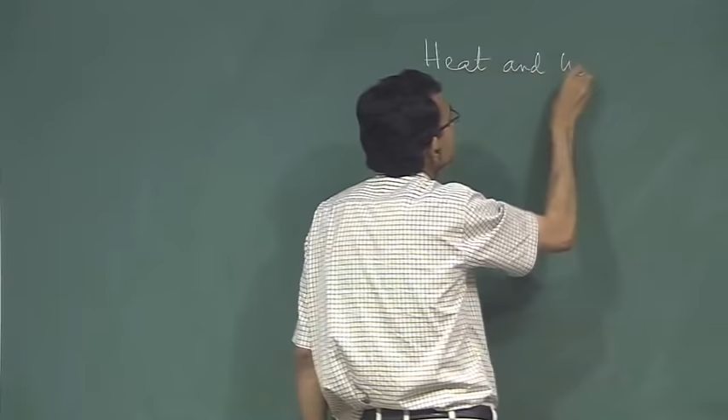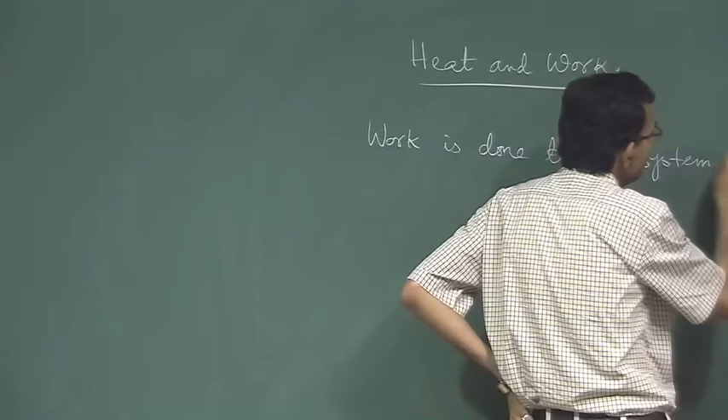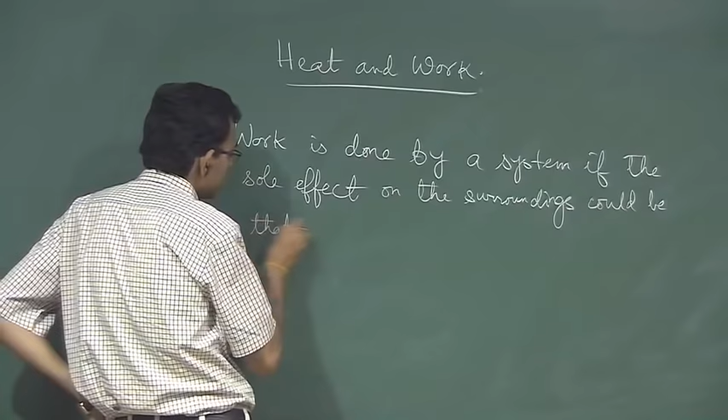There are many classical definitions of these two terminologies, and we will first start with work. Work is done by a system if the sole effects on the surroundings could be that of raising of a weight. This is a very classical statement. It says that if there is a raising of a weight, that gives a flavor of work done.

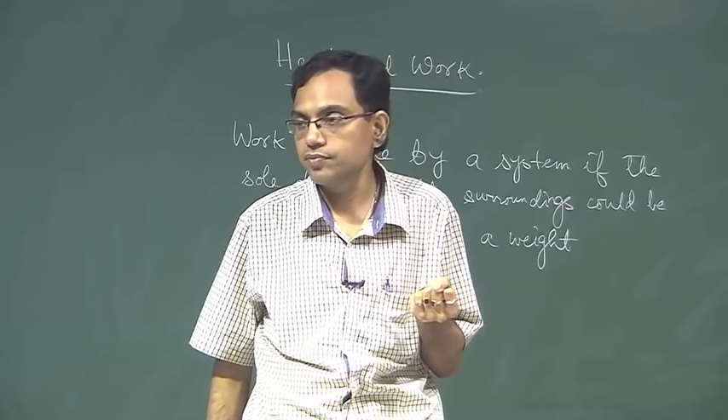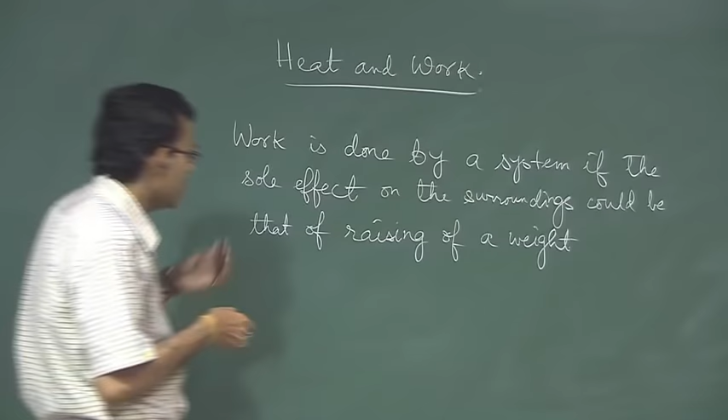Raising of a weight is conceptually representing a situation when you are pulling up something against gravity, that means you are creating a displacement against resistance. So raising of a weight does not technically mean it has to literally be raising of a weight. It means displacement against a resistance. That means if there is no resistance, then there is no work done.

Many of you attending this course are now undergraduate students in different engineering colleges and universities. When you were students at the higher secondary level, you expected a lot of resistance to establish a career, to get an entrance in a good university or engineering college or institute. You were really fighting against a lot of resistance, working in a tough competitive environment. But now that you've come to an engineering college, you believe life is like a luxury. You may be attending class every day but gaining no value, not doing any work, because there is no resistance against you, you are just having a happy-go life.

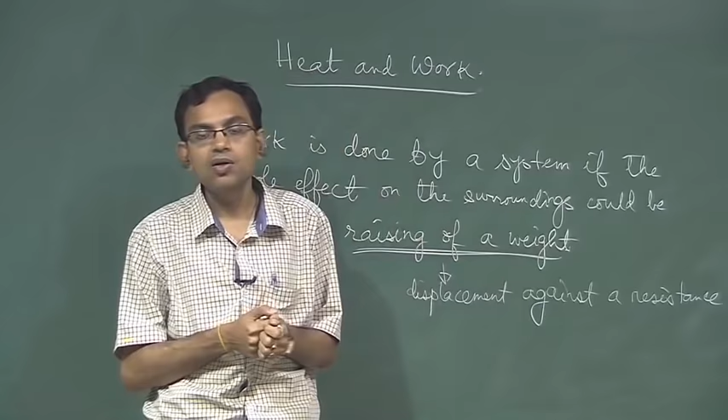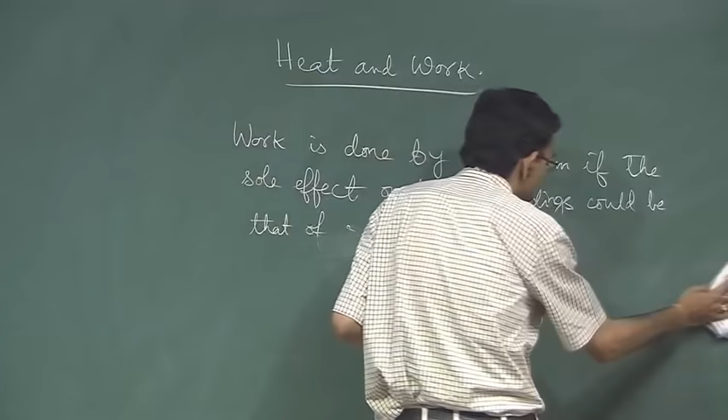So basically, in terms of doing work, if you have no resistance, you are doing no work. This is a very important philosophical aspect of thermodynamics. If you have to succeed, if you have to do net work, you have to overcome resistance. If there is no resistance, there is no thermodynamic work done. Now, to define this in more concrete terms, we will discuss various types of work.

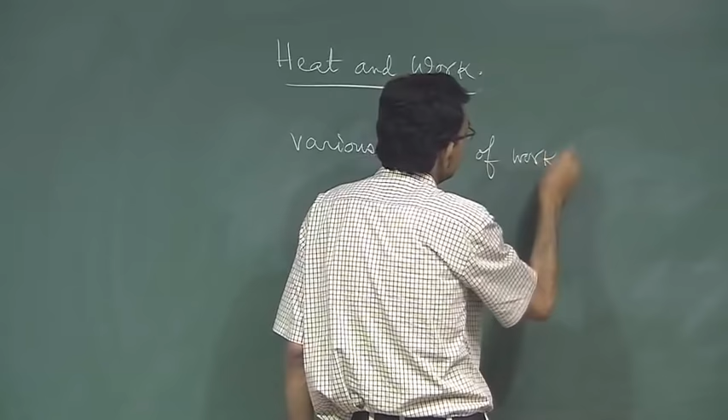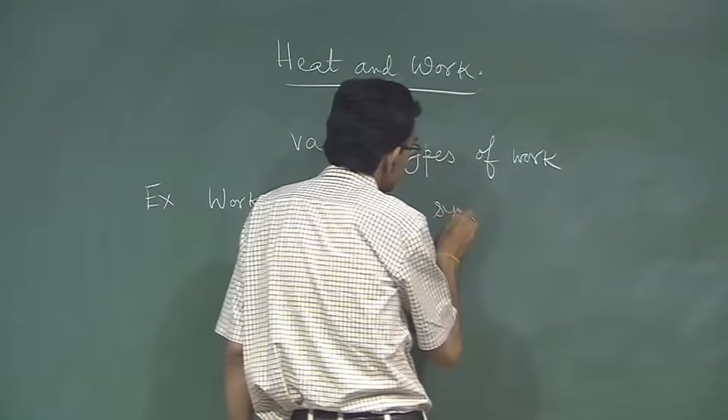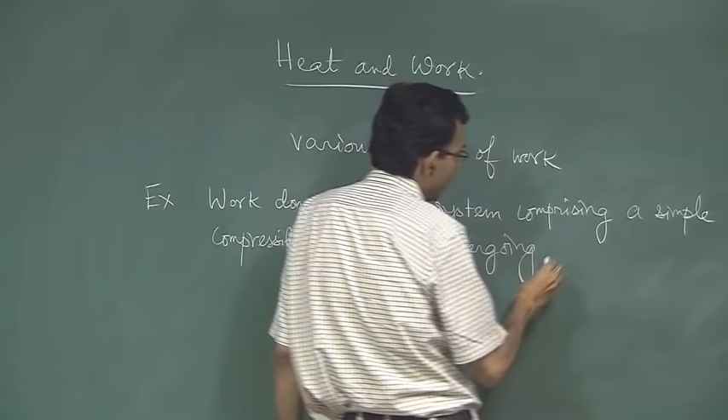The first example we will discuss is work done by a system comprising a simple compressible substance undergoing a quasi equilibrium process due to a moving boundary.

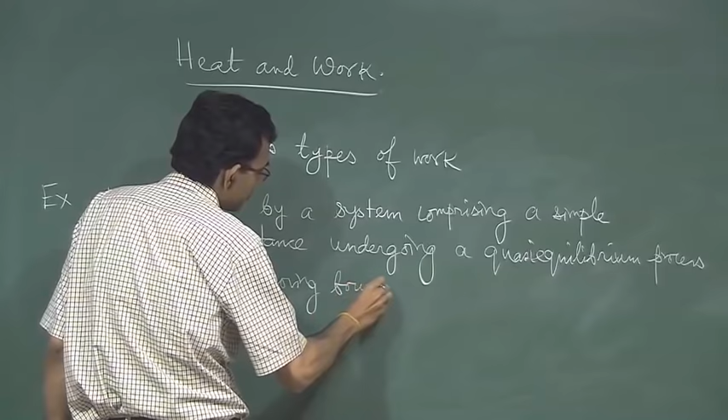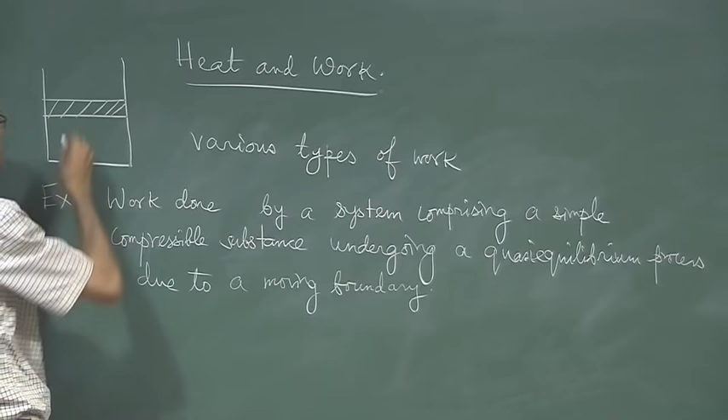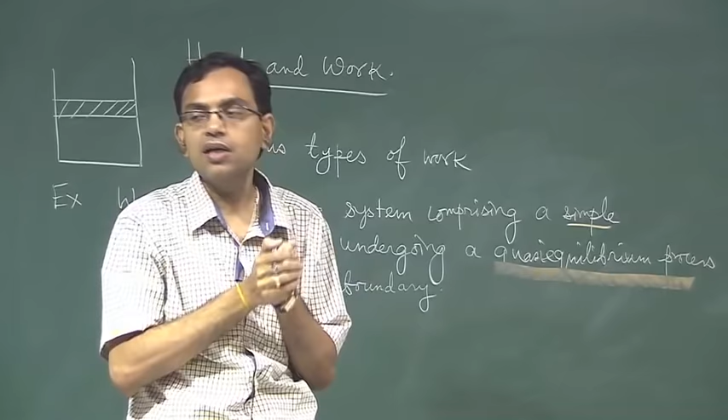We will get back to the old example referred to in one of the previous modules. Let us say there is a piston like this. There are two important keywords we are considering: one is simple compressible substance, another is quasi equilibrium process. Let us recall what a simple compressible substance is: a substance where the pressure, volume, temperature related effects are much more important than non-thermal effects like electrical or magnetic effects. In such a scenario there is a system boundary like this.

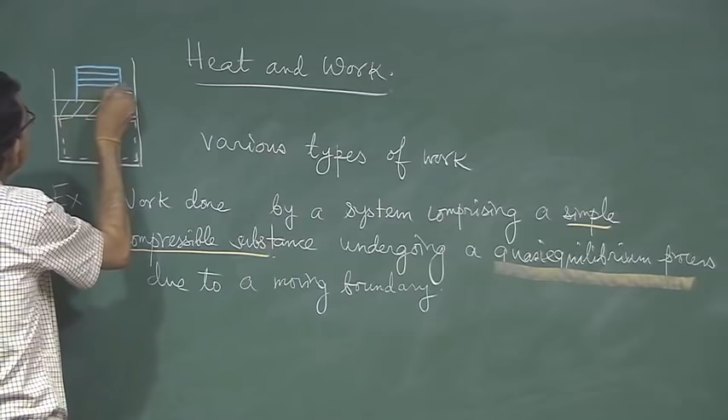This system boundary is moving in a quasi equilibrium process. How can it move in a quasi equilibrium process? I have given you one such example earlier. There are many such small loads. You remove one of these loads and the piston will displace slightly. Let us say it comes to a new position like this, so there is a displacement of dx.

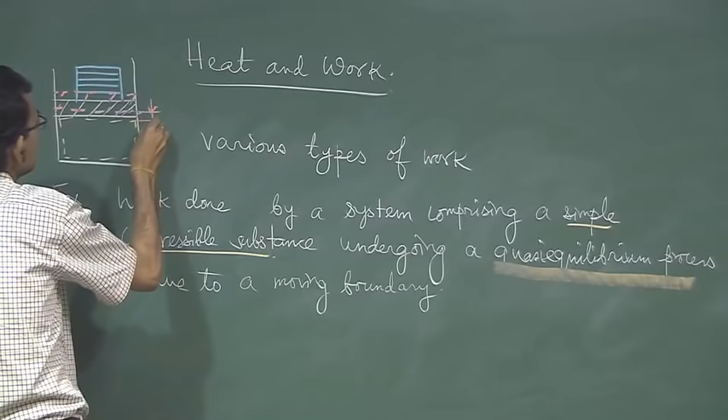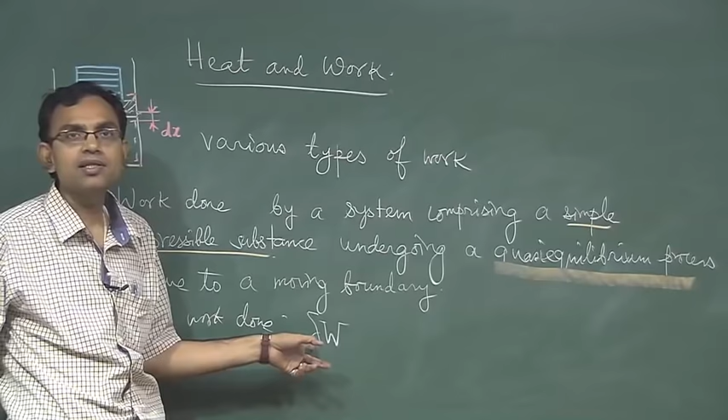So what is the elemental work done due to this displacement? Let us apply the definition. We are calling this delta W. It is very important why we are using this delta and not dW, and we will come to this in a moment. So what is this? Delta W is F resistance into dx. This is the basic definition. This definition is valid no matter whether the system is undergoing a quasi equilibrium process or not.

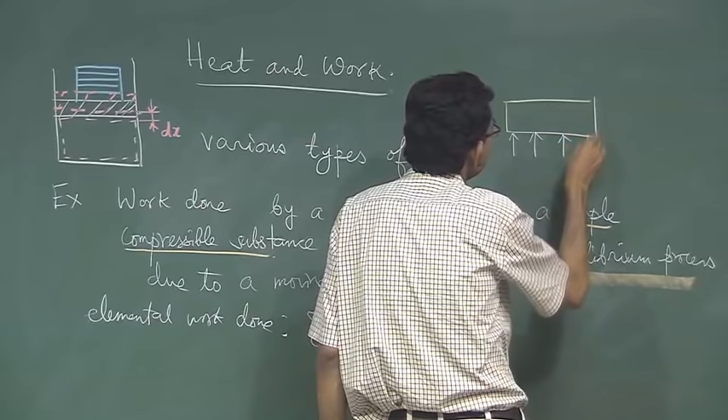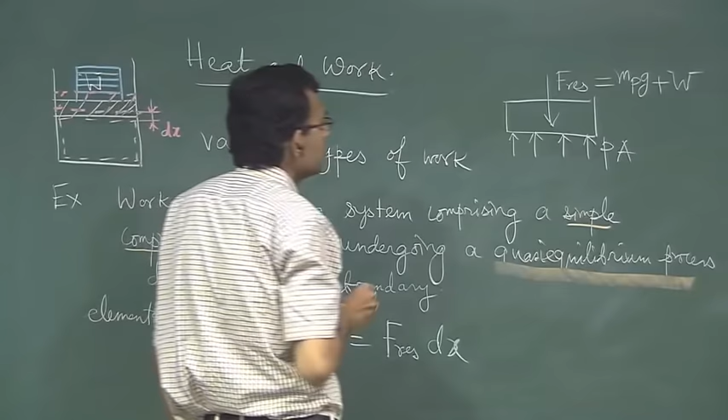But if we are able to describe this resistance force in terms of the pressure of the system, considering that the system is in equilibrium, then it is a quasi equilibrium process. How? Let us draw the free body diagram of the piston. So the resistance force, what is the resistance force? It is the mass of the piston into G, plus the total load W, the blue colored load, plus P atmosphere into A, where P atmosphere is the atmospheric pressure. For equilibrium, the resultant force is zero.

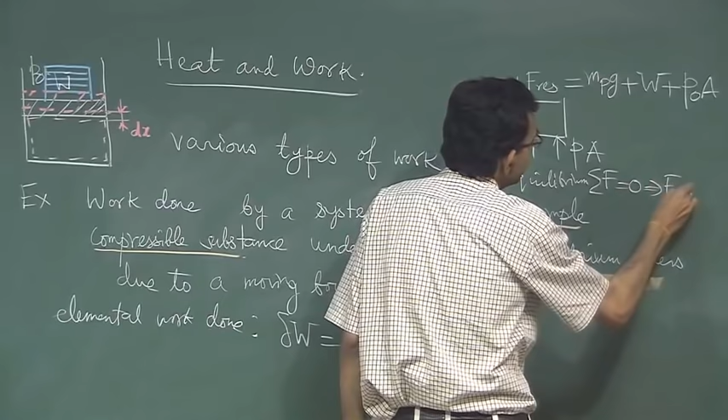That means F resistance equal to P into A. So, F resistance into dx, the moment you write this as P into A into dx, you are assuming that it is in equilibrium. So, F resistance into dx holds for any process, but when you replace F resistance by P into A, you are committing that it is in mechanical equilibrium.

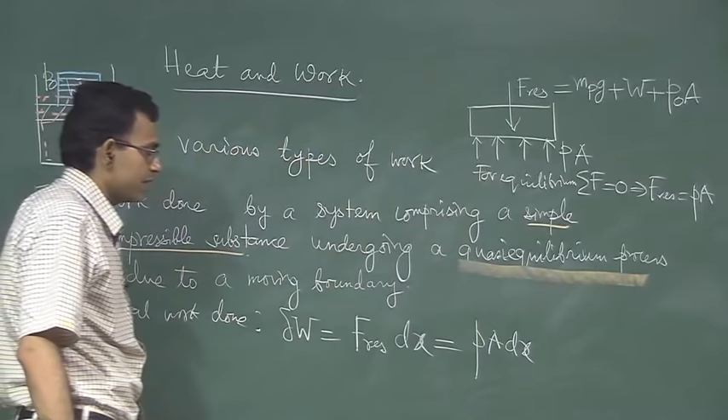So, it must be a quasi equilibrium process. Now, A into dx is dV, the change in volume, therefore this is P dV. So, sometimes it is loosely called as P dV work.

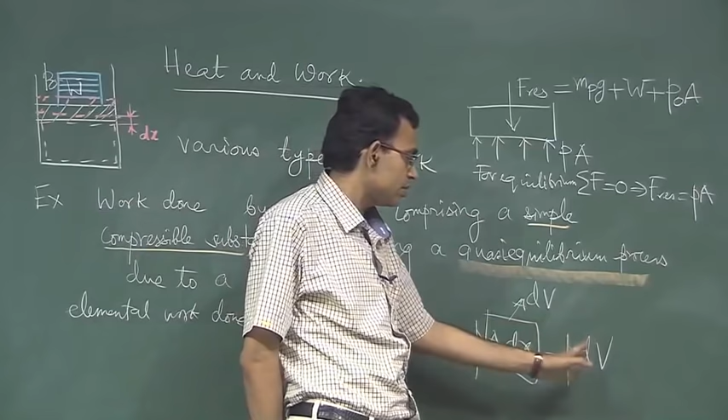Now, the question is that there could also be other forms of work, like electrical work, magnetic work and so on, but we are not considering those components here, because we are considering that it is a simple compressible substance.

Now, the very important question, why delta W? It is delta W because we are trying to distinguish these two symbols, d and delta. When we write d of x, we mean that this change only depends on the initial x and the final x, not the thermodynamic path by which it has undergone the change. For example, when we write integral of dV from 1 to 2, this is V2 minus V1, it does not matter whether the system has undergone a change in state by an adiabatic process, isothermal process, whatever process, the change in volume is final volume minus initial volume. This type of differential is called an exact differential.

And the function over which this exact differential may be operated is called a point function. Point function only depends on the endpoints, does not depend on the thermodynamic path by which the change in state has taken place. That means precisely, for example, in the PV diagram, if you draw a PV diagram.

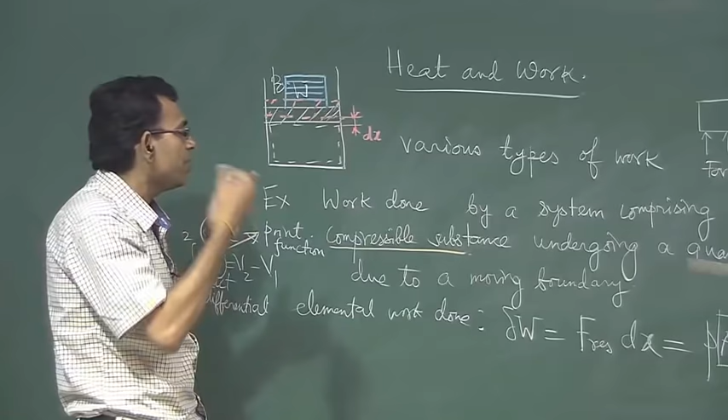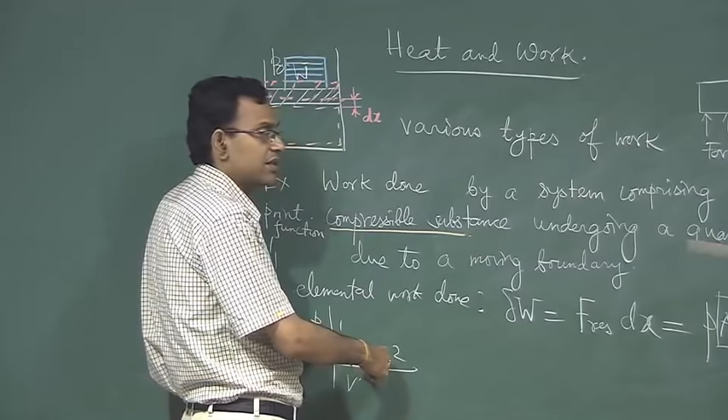Say this is state 1, this is state 2. So, there could be a change in state by various ways. One is this, another may be this, and the work done will be integral P dV, that means area under this diagram. So, clearly how P varies with V, depending on this, the total work done will be dependent. So, even if you fix up the state points 1 and 2, the work done will depend also on the path that connects 1 and 2, not just the end state points.

That is why this is called a path function, and this is an inexact differential.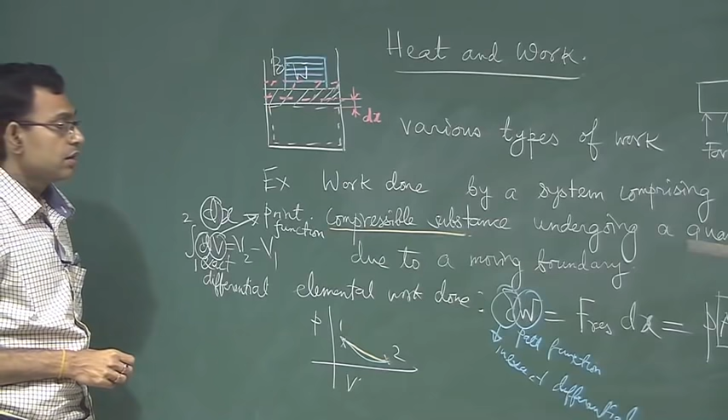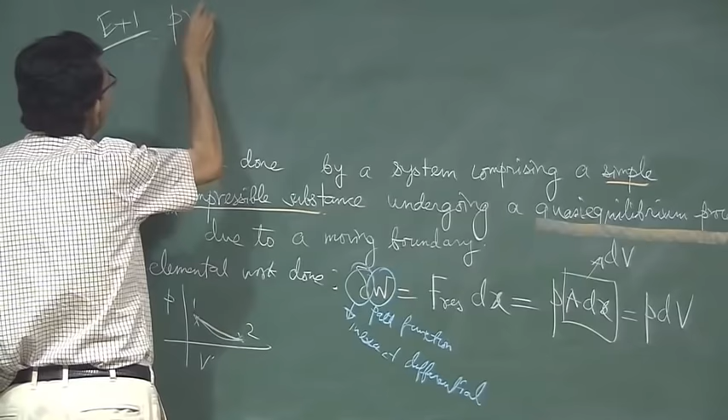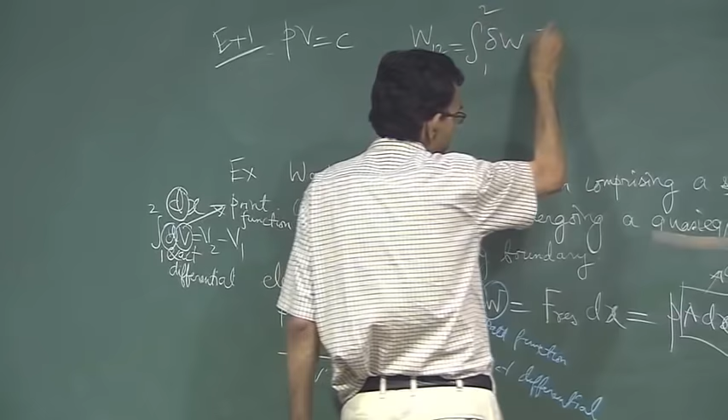So, let me give you a couple of examples. Let us define example 1, PV equal to constant. This is a thermodynamic path, typically the path for an isothermal process of an ideal gas. So, the work done is integral delta W from 1 to 2 is integral P dV equals C ln V2 by V1. C is either P1 V1 or P2 V2. So, P1 V1 ln V2 by V1.

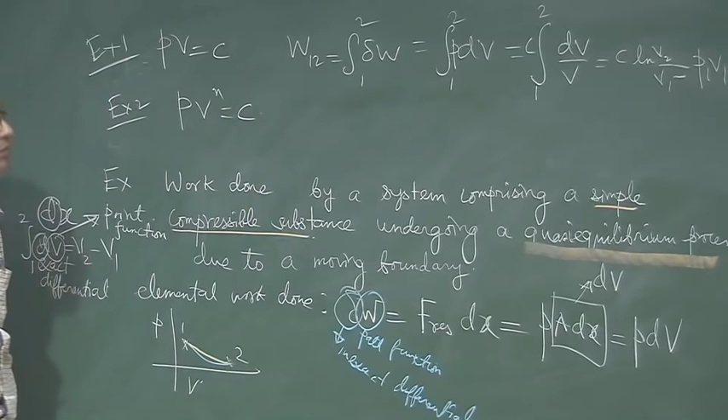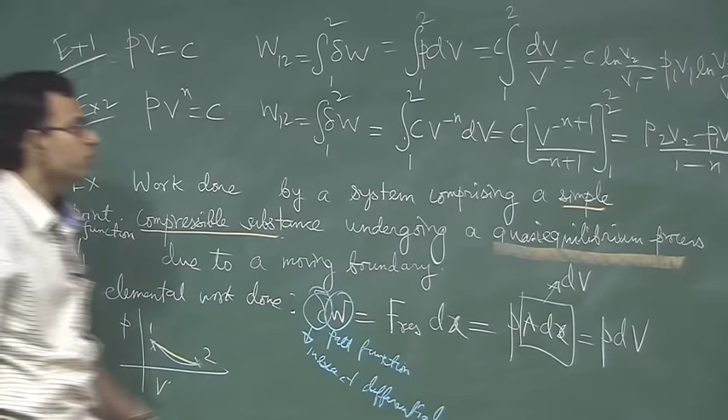Example 2, PV to the power n equal to constant. So, W12... this is C into V to the power minus n plus 1 by minus n plus 1. Instead of C you can write P V to the power n. So, this is P2 V2 minus P1 V1 by 1 minus n. P2 V2 minus P1 V1 divided by 1 minus n.

Now, these are examples of work done, if you are thinking of a moving system boundary and the system undergoing a quasi equilibrium process. We have to keep in mind that there are other forms of work.

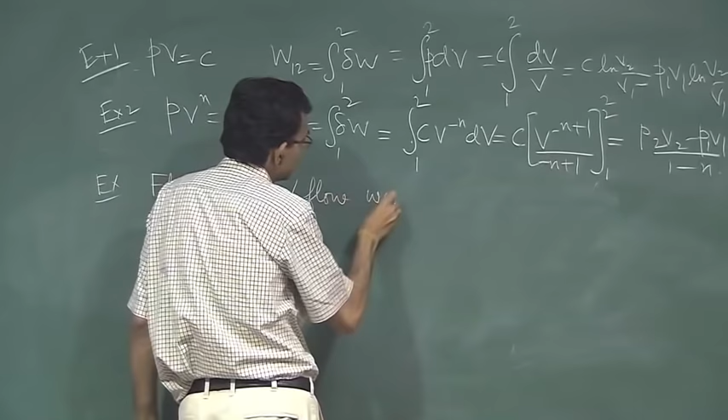So, the next example that we will talk about is a very important example. This is called flow energy or flow work.

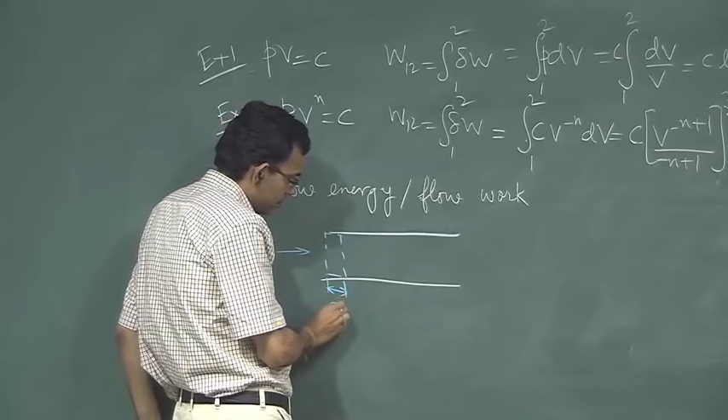So, let us say that there is a pipe, and there is a fluid that is entering the pipe. Because the fluid has pressure, the fluid must do some work to maintain the flow in presence of pressure. So, let us say there is a displacement of the fluid by an amount dx, and let A be the cross sectional area of the pipe. Why have we considered a differentially small region? The reason is that the pressure will not vary significantly over this region, otherwise the pressure may vary.

So now, what you have here is you can write this as the work done is P into A into dx.

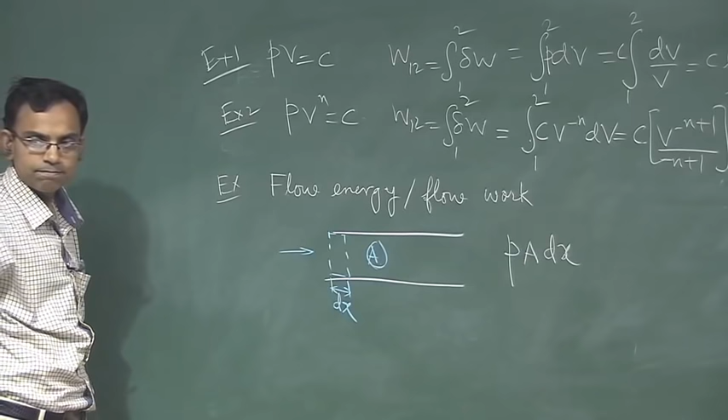What is the work done per unit mass? This is the work done per unit mass to maintain flow in presence of pressure.

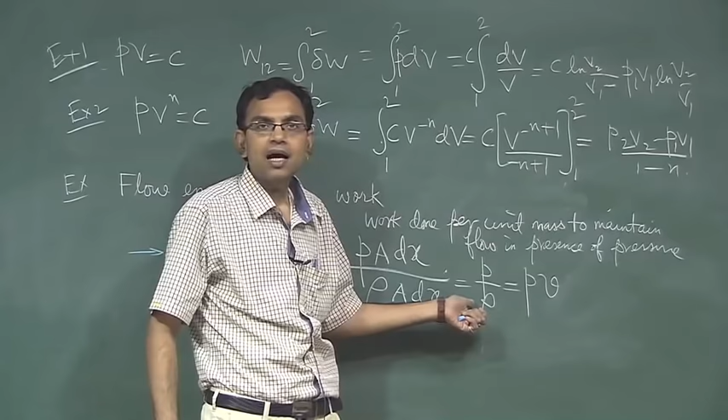This divided by mass, where mass is density times volume, which is A into dx, gives P by rho, or P into specific volume. This P by rho is something familiar to those who know fluid mechanics from Bernoulli's equation, since 1 by density is specific volume. So pressure into specific volume is the work done per unit mass to maintain flow in presence of pressure. This is called flow energy or flow work.

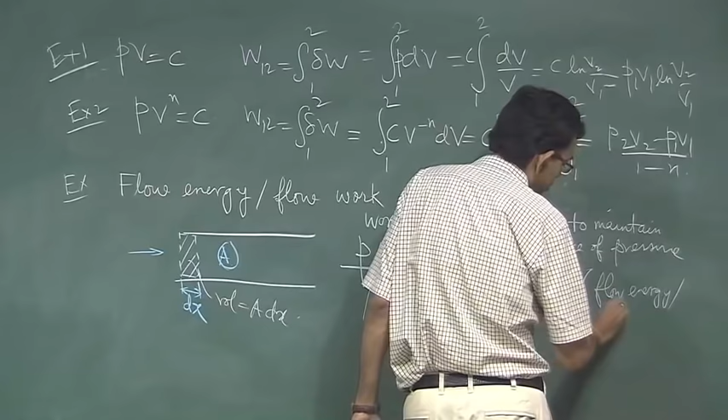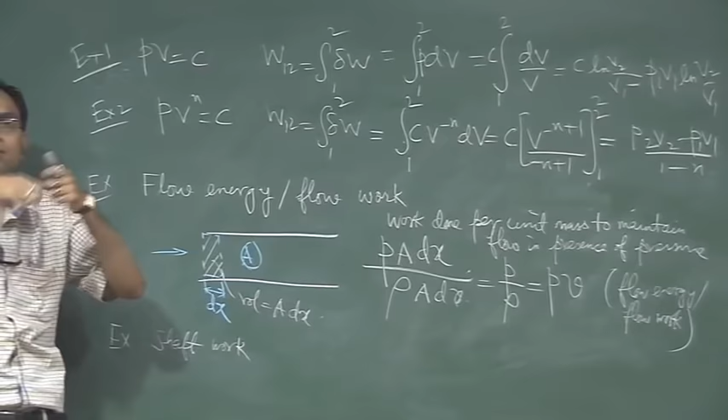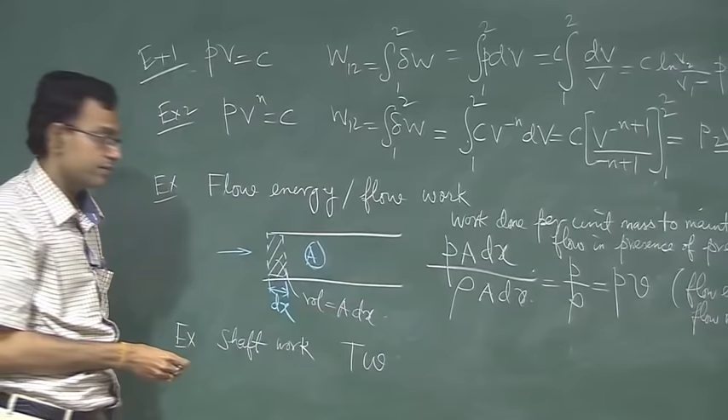There could also be an example of something called shaft work. What is shaft work? If there is a shaft, a rotating cylindrical device undergoing rotation, it is overcoming a resistance, and the corresponding work is the torque times the angular velocity, the rate of work done. So here the rate of work done is normally expressed rather than the work itself, that is torque times angular velocity. This is the shaft work.

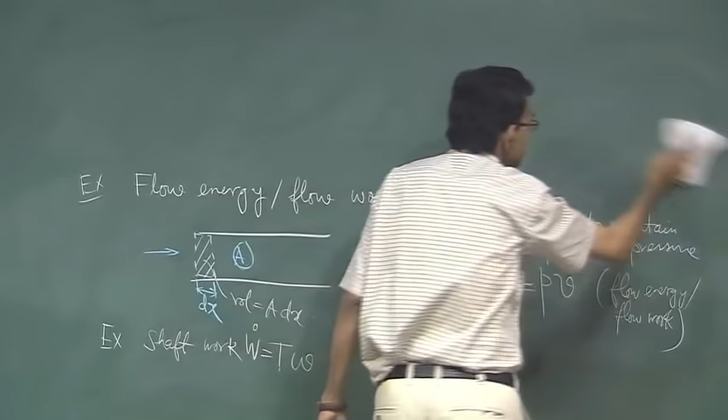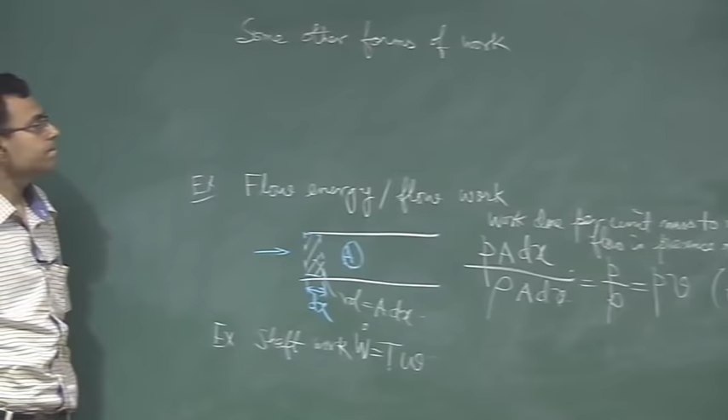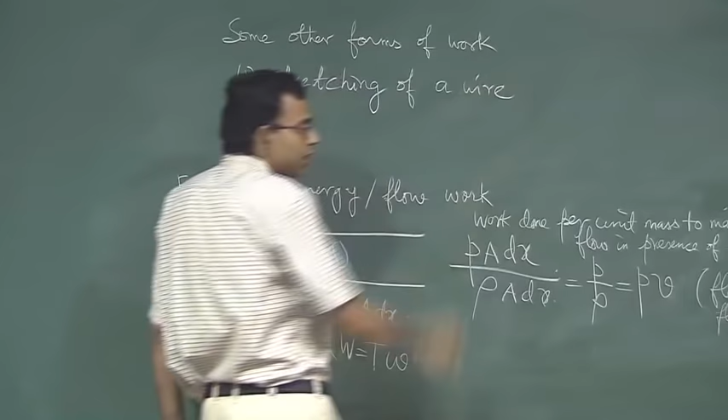There could also be some other forms of work. What are these? Like, work due to stretching of a wire, done because of stretching of a liquid film due to surface tension effect. Then aligning of ions in a paramagnetic salt due to magnetic field.

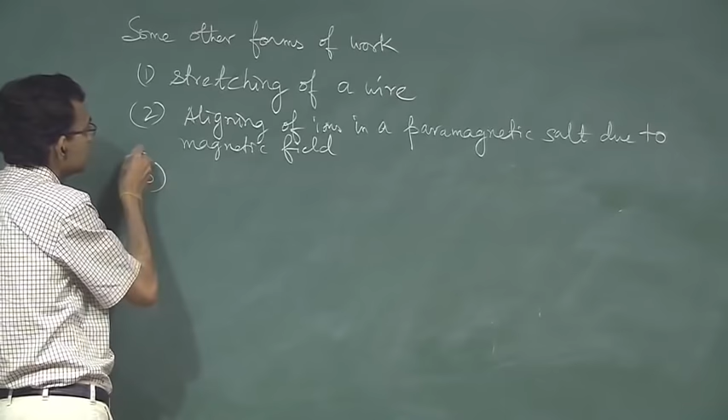Third is electrical work. Like if you have an electrical potential E and there is a charge dq flowing in its presence, then the electrical work is minus E dq. Now the question is, when this minus sign is put, when do we consider the work as positive and when as negative. This is something which is the sign convention that we develop and adopt.

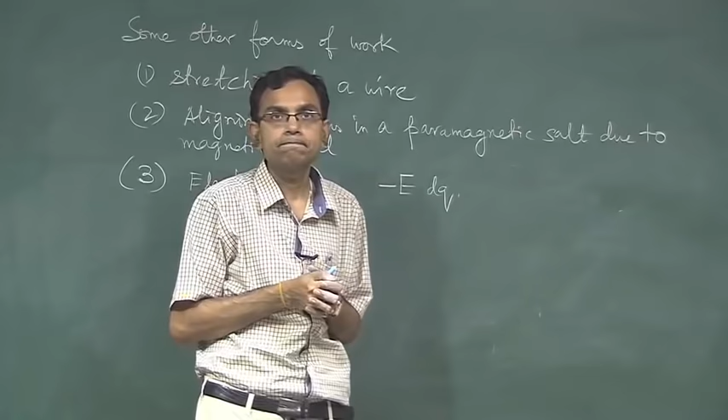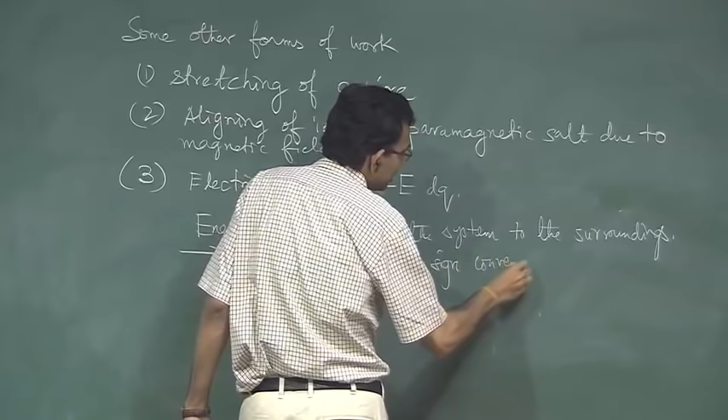If we say that work done is positive when energy leaves from the system to the surroundings, that is, the system is getting rid of energy by utilizing some of that to do work, then that is called positive work. So energy transfer from the system to the surroundings, by our sign convention, we call positive work. Somebody else may take a different sign convention, but this is the one commonly taken in almost all thermodynamic texts.

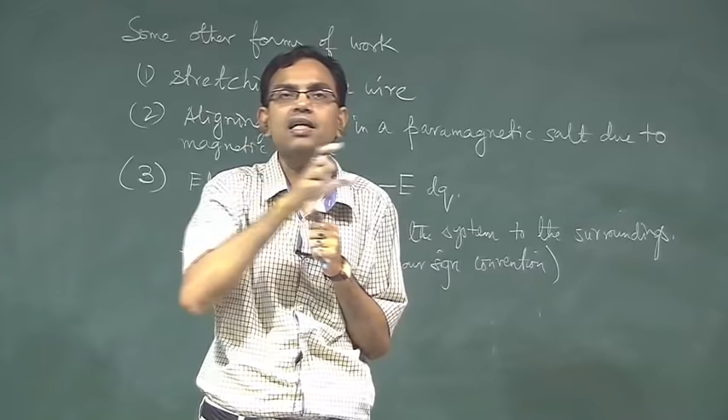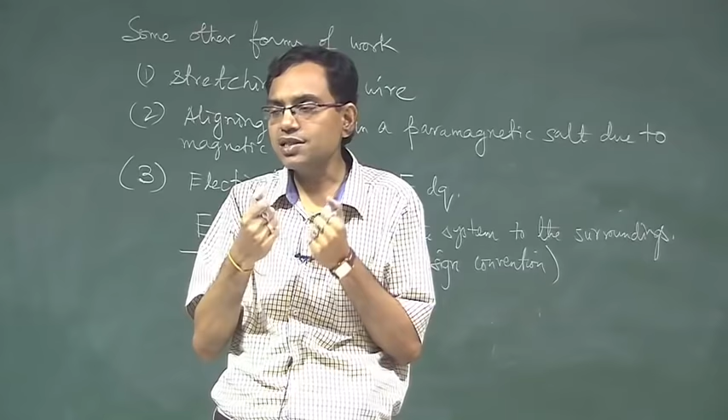Now there are certain important things about work. First, work is not a property. Why? Pressure is a property, volume is a property, but work is not. Mathematically, the differential of work is not an exact differential; it is represented not by dW but delta W. That means the work done does not depend only on the end states, but also on the process connecting them. So the differential of work is inexact, and therefore work is not a property. The second important point is work is an energy in transient, meaning the system does not possess any work; it is a system boundary phenomenon taking place during a change of state.

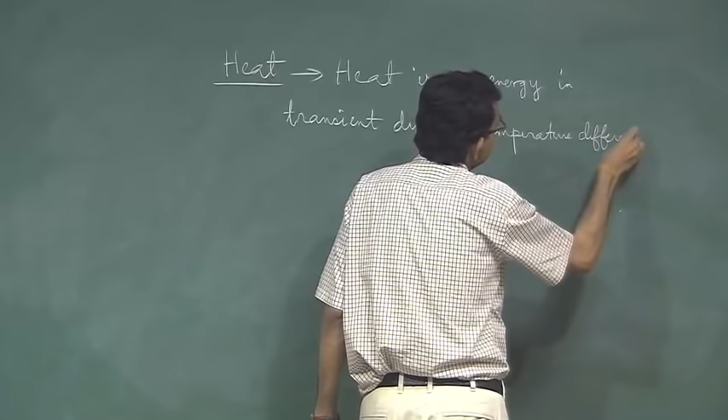There is an analogous quantity in thermodynamics which is also very important, and that is heat. What is heat? Heat is defined as an energy in transient due to temperature difference. That means heat is an energy which a system does not possess. Sometimes we loosely say that a bucket of water contains 1 joule or 1 kilojoule of heat, but this is completely wrong, because heat cannot be possessed by a system. Heat can only be transferred across a boundary, either from system to surrounding or surrounding to system, based on temperature difference, and it stops when the temperature difference is nullified. So heat is also not a property, and that is clear because the heat transfer from state 1 to state 2 depends on what kind of process it is.

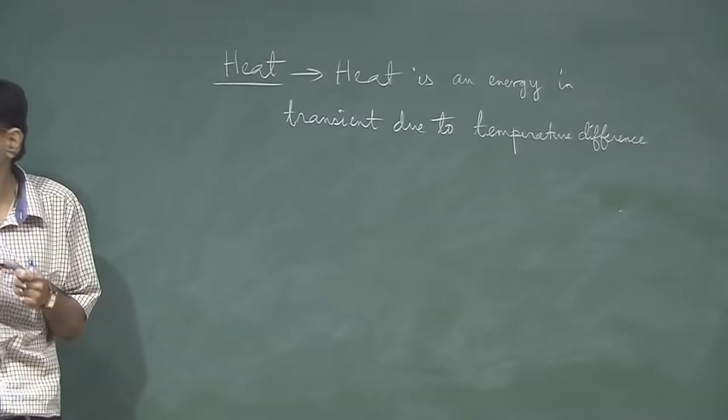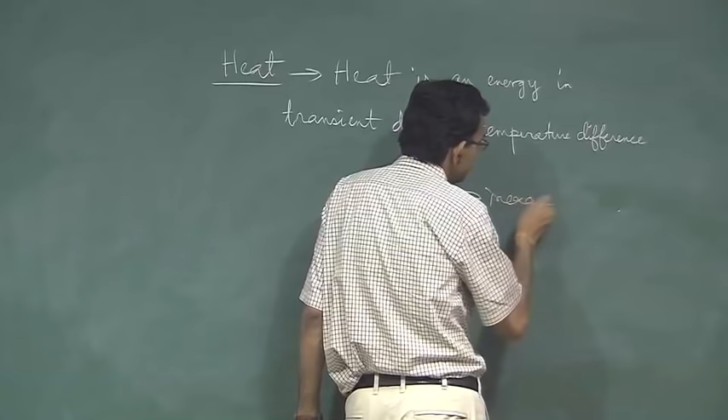For example, if it is an adiabatic process, there is no heat transfer. If it is an isothermal process, there is heat transfer. So we can say that if we call Q as heat, then the differential of heat, delta Q, is an inexact differential. So, this is also inexact differential. In this way there is a lot of similarity between heat and work.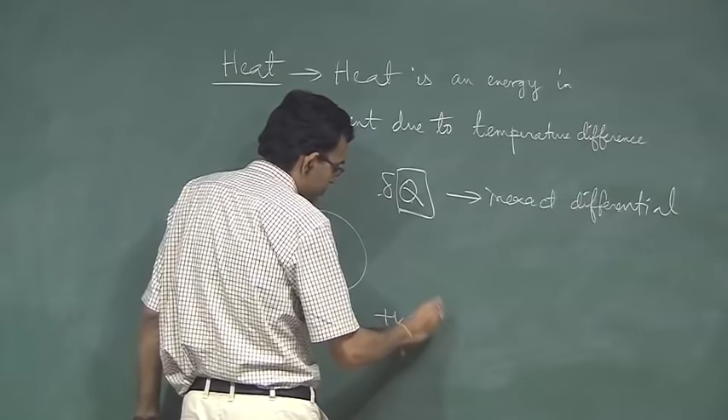The only dissimilarity may be as per the sign convention that we adopt. If there is a system like this, if there is heat transferred to it, we call this positive. Again, our sign convention.

So, heat transferred to the system is positive, that means energy supplied to the system in terms of heat is positive; energy leaving the system in form of work is positive work. That is our sign convention. Somebody else may adopt a sign convention that no matter whether it is heat or work, if energy is entering the system it is positive, if it is leaving it is negative, or the other way around - that can also be a sign convention. But we have to stick to a sign convention and write appropriate expressions using these conventions when we write the mathematical forms of various laws of thermodynamics, which is the main agenda of this course. The first law we will discuss as a follow up of this.

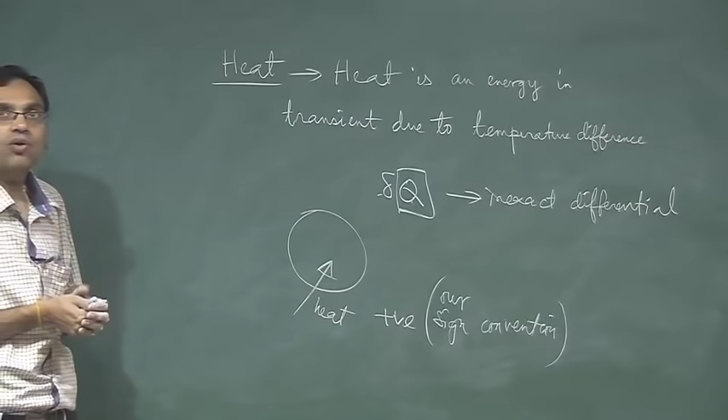Now, before doing that, let us close today's discussion through a worked out example that I want to discuss. This is the second chapter that we are considering. These problem numbers we are describing like problem number starting with 1 is for chapter 1. We have not discussed any problems so far as the properties of pure substances go, and we will discuss that in the tutorial session that we will be having next.

But today we will be discussing one example problem. This is problem 2.1, and you can look into the problem statement. The problem statement is like this: a piston cylinder arrangement initially contains air at 150 kilopascal and 400 degrees centigrade. The setup is allowed to cool to ambient temperature of 20 degrees centigrade. Is the piston resting on the stops in the final state, and what is the final pressure in the cylinder, and what is the work done by air during this process.

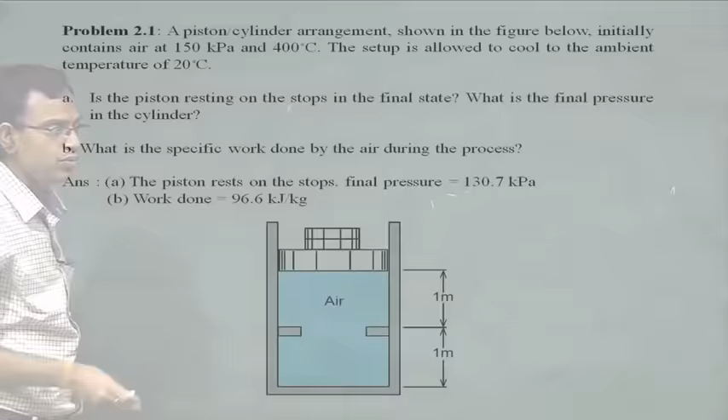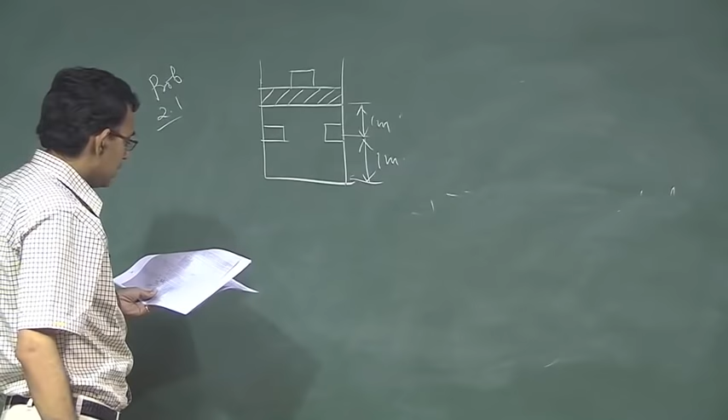So, let me try to draw a schematic of this problem. It is of course given in the problem sheet that will be there with you. So there is a, let me draw the schematic. This is problem 2.1. So there are stops, this is 1 meter - okay, I have not followed the exact proportion - this is also 1 meter. So it is given as state 1. The system is air, this is the system.

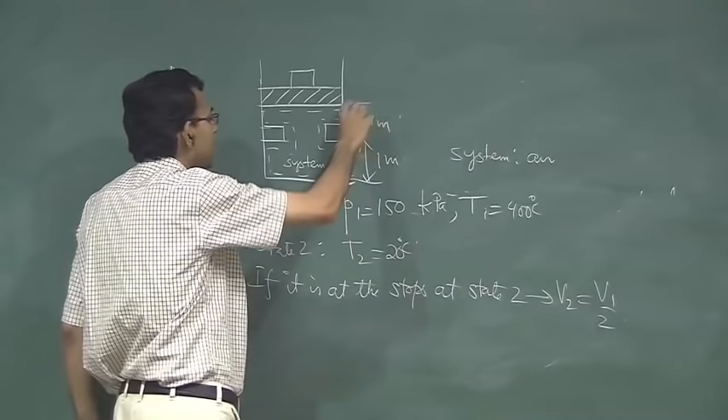State 1 is P1 equal to 150 kilopascal, T1 equal to 400 degrees centigrade. State 2, T2 equal to 20 degrees centigrade. So at state 2, is the piston against the stop? How will you calculate? See, state 2, if it is at the stops, then V2 is V1 by 2. Why? This is 1 meter; if it is against the stops, the initial volume is 1 plus 1, 2 meters times the cross sectional area. The final volume, if it comes down to the stops, is 1 into cross sectional area. Therefore, V2 is V1 by 2.

And if you assume air as an ideal gas, which is not a bad assumption, then P1 V1 by T1 is equal to P2 V2 by T2. V2 is V1 by 2. T2 and T1 are given. T1 is 400 degrees centigrade, that is 673.15 Kelvin. Remember that for using this formula all temperatures must be absolute temperature, and T2 is 293.15 Kelvin.

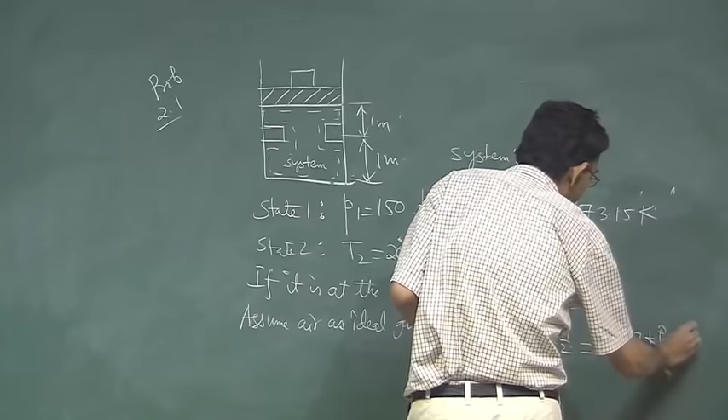So if you calculate all this, you will get P2 is 130.7 kilopascal, which is less than P1. So P2 is less than P1. See, P1 was 150 kilopascal and T1 400 degrees centigrade. That means the resistance pressure is also 150 kilopascal if state 1 is in equilibrium.

Now, here at state 2 the resistance pressure is still 150 kilopascal, but the inside pressure is 130.7 kilopascal.

So basically the piston wants to come further down, only the stops are preventing it from coming further down. So the piston is at the stops.

So when the piston is at the stops, if you want to draw a PV diagram, you have state 1. From state 1, at constant pressure the volume has decreased. Why at constant pressure? We are assuming that in all problems we discuss in thermodynamics, the process is quasi-equilibrium. So that means initial pressure is 150 kilopascal.

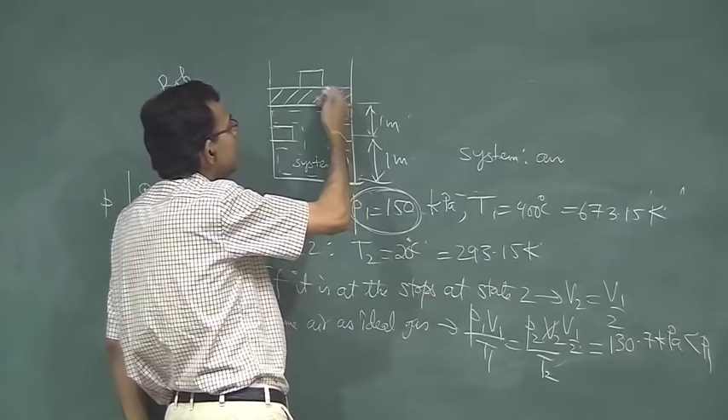So the resistance pressure is also 150 kilopascal. So if it is coming down, it is coming down slowly, so that at all intermediate states its pressure inside is also same as the resistance pressure, which is 150 kilopascal.

And then when it has come to the stops, so this is not state 2, then at constant volume, at the stops, the pressure is falling to 130.7 kilopascal. So then this is state 2.

So what is the work done? This part is not important so far as the work done is concerned. Work done is integral of P dV from state 1 to state 2A, because from 2A to 2 there is no change in volume. Because there is no change in volume, there is no work done.

So this is nothing but, what is this pressure? This pressure is 150 kilopascal. So this is P1 into V2A minus V1.

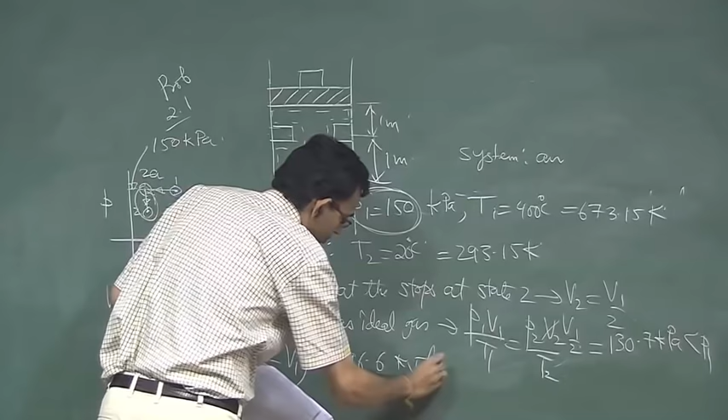So if you put the values, then this is minus 96.6 kilojoule per kg, if you consider 1 kg of air.

So how do you do that? You can use PV is equal to RT. So if you write it for, let us say m is equal to 1 kg as the system, you can use PV is equal to RT and replace PV by RT. So it is basically R into T2 minus T1.

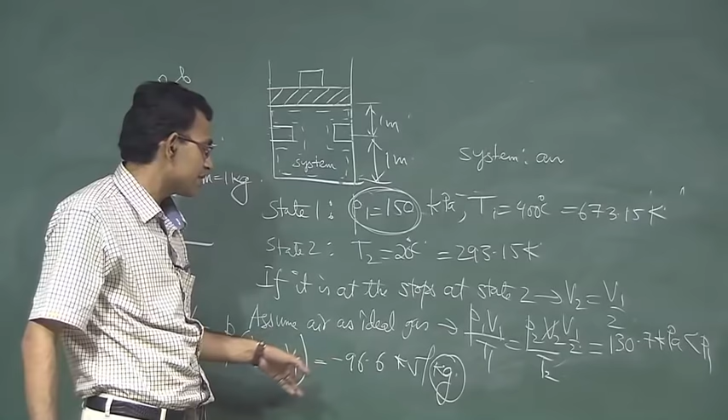So you have T1 and T2 known, and then you can calculate the total work done. So this is just one example.

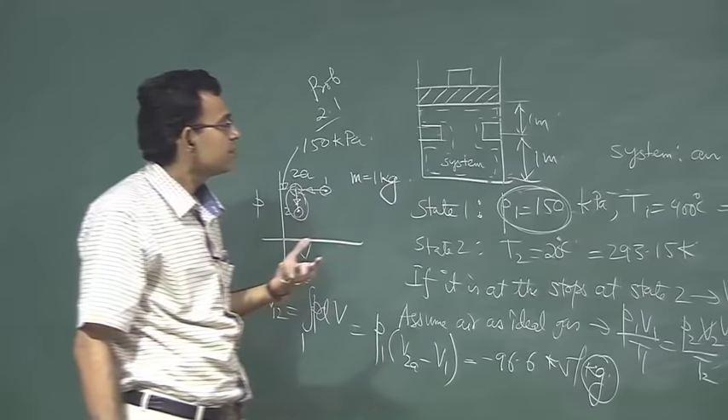We could discuss several other examples, and I want to plan all these examples carefully so that we can get a better grasp of this particular way of problem solving that is so much typical to thermodynamics.

One final remark I want to make before closing today's session is that thermodynamics, if you think of the algebra involved, is actually much simpler compared to the algebra involved in many other subjects in engineering. But thermodynamics is often considered to be a tough subject from the point of view of many students, because the problems are not stereotype problems.

For each and every other problem, you have to use a different outlook and a very fundamental approach to address the problem. So it is not that you have one stereotype formula and you plug in the value to solve a problem. For different problems, you may have to use different concepts and different ideas based on the fundamentals you have learned, and that is why thermodynamics may become so interesting, at the same time a little bit tricky.

So with this little bit of note, we conclude today's session.

In the next session, we will be having tutorials. The tutorials will cover both properties of pure substances as well as heat and work, but we will try to balance the tutorial in such a way that we solve a couple of problems from properties of pure substances and a couple of problems based on heat and work. And regarding properties of pure substances, I will start with a simple short question.